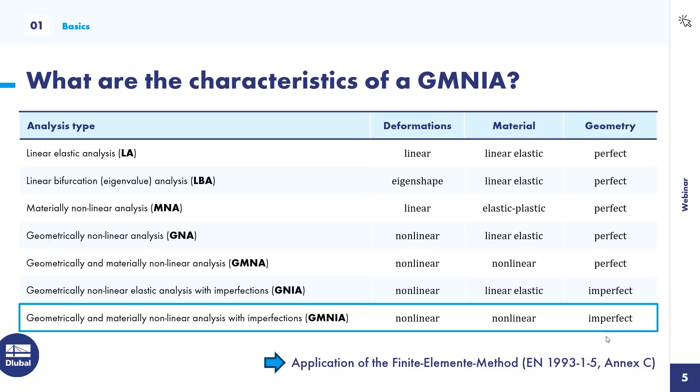Some rules for the application of a finite element method in this context are given in Eurocode 3, part 1.5, Annex C. This will shortly be replaced by a dedicated Eurocode dealing with finite element methods and their application for steel structures, bundled in Eurocode 3.1.14 in the second generation of the Eurocode. I will refer to this new code as well during this presentation.

You can think of the GMNIA as a virtual capacity test, which means that the design load is increased by a load factor until a clear state of failure is reached. Two limit states are defined in Eurocode 3 part 1.5 for the definition of failure and the determination of the critical load factor, which is the minimum of the following.

The load factor when the maximum of the load deformation curve is reached, as shown here on the left side of the slide, and the load factor when a maximum value of the principal plastic membrane strain is reached.

This is usually given by the annex or the base code as 5%, which is tolerable, but there might be some additional requirements in the national annexes.

The critical load factor is then the minimum of those two alpha U values, and this is then checked against the product of two safety factors on the resistance side, namely alpha 1, which describes the uncertainty of the numerical model, and alpha 2, which describes the uncertainty of the load and resistance model.

Here it is recommended to stick to gamma M1 if the observed failure mode corresponds to stability, or gamma M2 if we see that the maximum plastic membrane strain is reached.

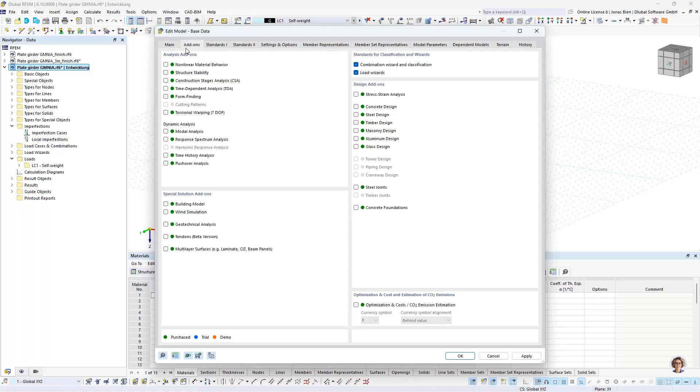All right, after we clarified this, let's go into the program and start modeling this. So I have already prepared a fresh file where we can now introduce the plate girder. As you can see, I have no objects here whatsoever, and also if we look into the base data of this file, there are no specific options activated. It's all a standard type of model, 3D and so on.

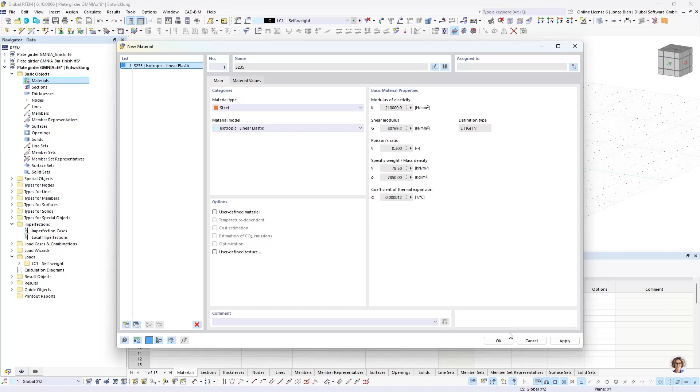Okay, so first of all, let's start with the material. We said we want to use an S235. So let's choose one. I always like to choose one that is related to Eurocode 3, but another one would also work.

Then let's move on with the modeling of the member itself. We could either directly go with the surface definition and try to place the flanges and the web plates in the correct locations, and also then we have to assign the correct thicknesses and so on. But we can also use another way. We can first start with a member that has the correct cross-section, and then we transfer this member into a surface model.

So I start with defining a parametric welded double symmetric I section in my section dialog with the respective dimensions that I want to have. So height is 1020 millimeters, width 360, thickness of the web would be 5 millimeters, and the flanges 20.

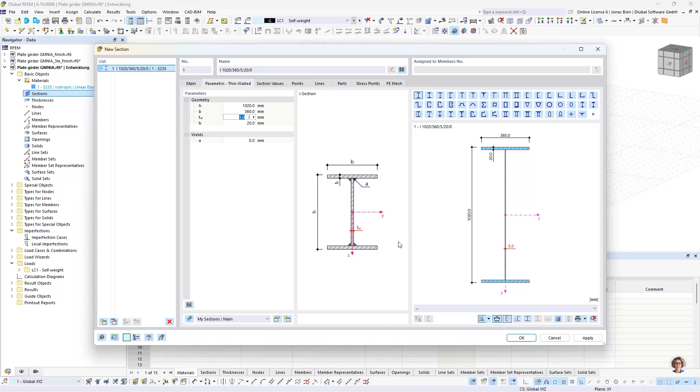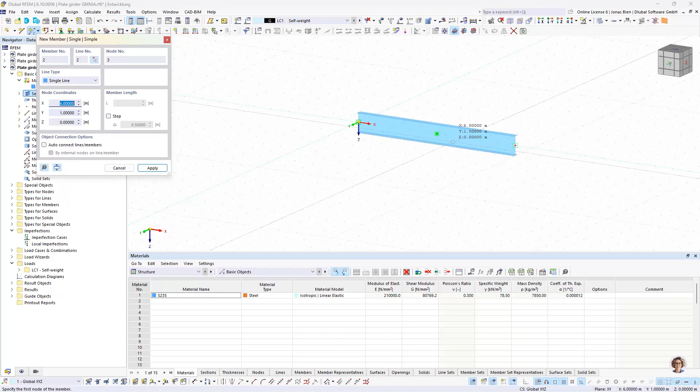So now it more or less looks like the picture that I have shown on my slides. I accept via OK, and then I just place half of my plate girder in the model. So one span was 4.5 meters, so I want to take in the initial model 2 panels, and then we can later mirror it.

So before I generate surfaces from this member, I also divide it, because I want to have a stiffener and some load introduction lines at the central position here. So I first divide this member with one intermediate node, and then I move on and generate surfaces.

And what this does, it already automatically generates these thicknesses that I need to represent this section in a surface model. It creates the nodes, the lines, and finally the surfaces that are necessary for this model. So this is a good starting point, I think.

Next, we want to create the stiffeners to finish the surface modeling part. Therefore, I need an additional thickness of 12 millimeters that I wanted to use for the stiffeners. I can also write a reminder for myself that this is for the stiffener, this is the web plate, and this thickness is defined for the flange plates.

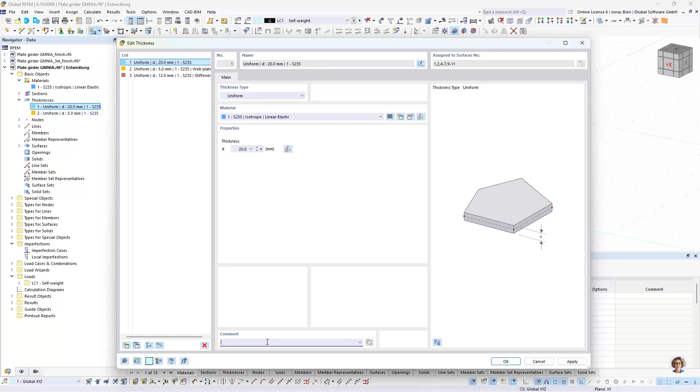Okay, I agree. And then I just place some rectangular surfaces in those positions where I later want to apply the loads. And if we think about this as the left half of our plate girder, we also said we want rigid end posts. So I would generate this by adding an outstanding cantilever part with an additional stiffener to really have a

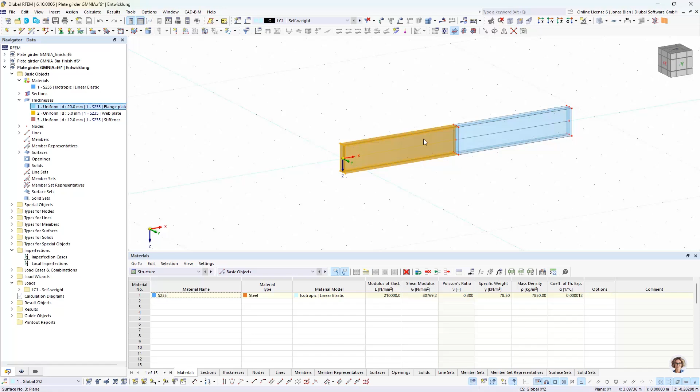very compact section at the end that can serve as a rigid end post. I can do this by just copying this panel here to the end. The length of this is also 4.5 meters, and I want a very short and compact cell here at the end. So I just move the end section back towards the initial position of this stiffener by, let's say, 4.2 meters.

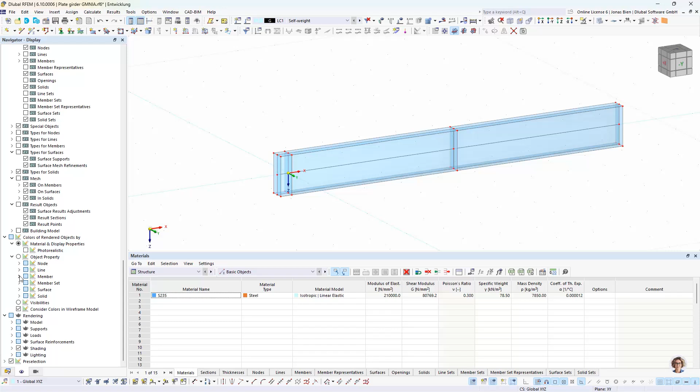And then I have a nice rigid end post without needing to define additional surfaces by hand. Okay, oops, didn't mean to do that. Alright, so then we can check if we assigned the correct thicknesses. I always like to check the rendering based on thickness, so we get a nice overview of what thicknesses are represented in the model and where they are. This all seems fine to me.

So we can continue with assigning the supports. I want to avoid singularities at the vertical supports, so I try to use line supports at this second line of the stiffener here. I just want to support this line in the Z direction. I don't want to restrain any deformation along the line or in the transverse direction.

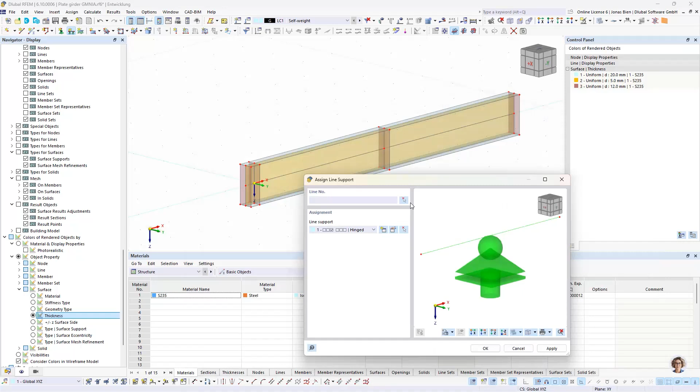I already see another problem: because we defined those rectangular stiffeners over the existing surfaces, we have some double lines here. We can quickly merge them by cutting and merging via this tool, and now we have single lines at these locations. That's a quick fix. Now I move on and assign the vertical supports at these two lines.

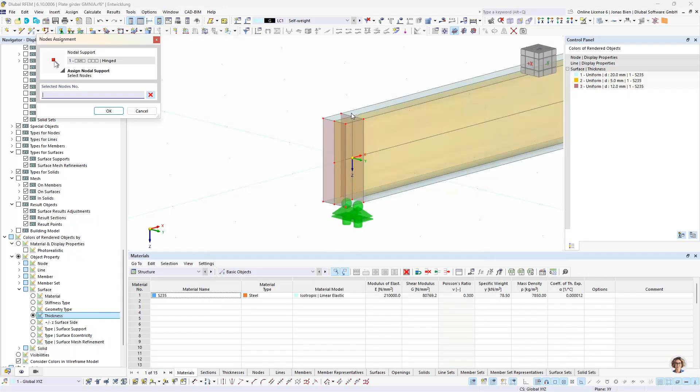Then I need to take care of the lateral supports. These I assign as nodal supports at some points that are very stiff. First, I have my lateral supports that I wanted to assign at the ends and also at these quarter points. I choose as a point of reference the crossing between the flange and web plates and the stiffeners. And then I also need to make sure to couple this point in the Y direction so it does

not tilt. I also need to somehow support my model in the X direction. That's why I also want to define one support in the global X and Y direction at the lower flange here, like here. Alright, so that would be the respective support conditions that I want for my half model.

I can later just mirror them when I want to create the full model. But before we do so, it would be wise to also define the loads, because there we can also leverage the mirror operation. So we go ahead and define our loads. Maybe one look back to the task description.

Here we can already see that we have concentrated loads, 3 different loads above the endpoints and the quarter points. The first represents dead weight, the second comes from snow, and the third comes from wind pressure. So I want to define these separately for those 3 load cases. Let's start with the definition of the dead load in the first case.

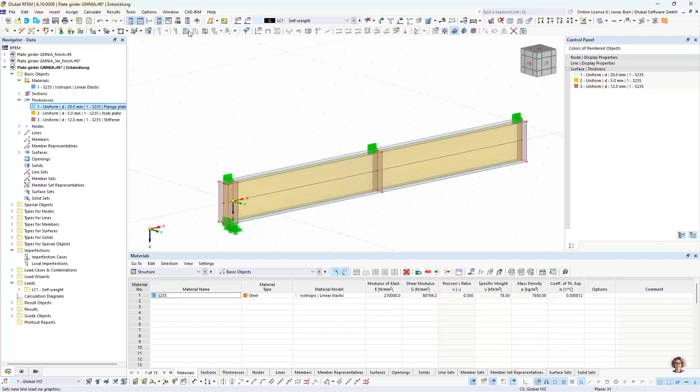I want to apply those loads as line loads, again to avoid singularities when using nodal loads. I could calculate my equivalent line load for a concentrated load of, for example, 15 kilonewtons by hand. But I could also use load distribution type uniform total, where the program does this job for me. I just have to enter the total load that I want to apply over the length of one line. Since I have 2 lines here, I need to divide my 15 kilonewtons by 2 to get the total

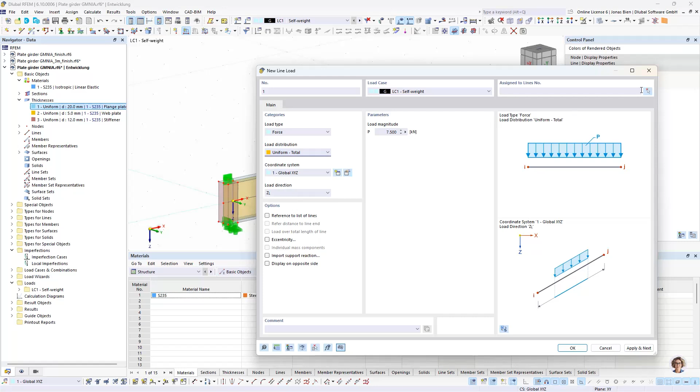load for one line. I want to apply this in the Z direction, and now I just need to select those 2 lines, assign this, and RFEM already calculated the correct kilonewton per meter value for us. If we multiply this value by 0.36 for the width of this flange, then we get 15 kilonewtons in total, as we wanted.

Okay, we can then just copy this definition to the internal lines or purlins where the load is transferred to our plate girder. Here we had a slightly higher load of, I think it was in total 25, so each line gets 12.5 kilonewton. And this definition we can also copy to the central lines here.

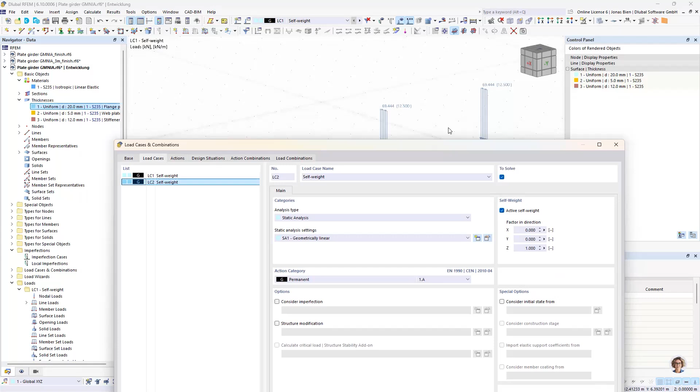Now we make a smart move and generate our second and third load case from our first load case. We do this by copying our first load case. This means that also all loads that we defined in this load case are copied, so we just have to change the action category. Now in the first place, I want to define the snow loads, and we have to take care to deactivate the self-weight if we copy from the self-weight load case. Otherwise, that would be considered twice.

And we do the same for wind, choose the appropriate action category, and click OK.

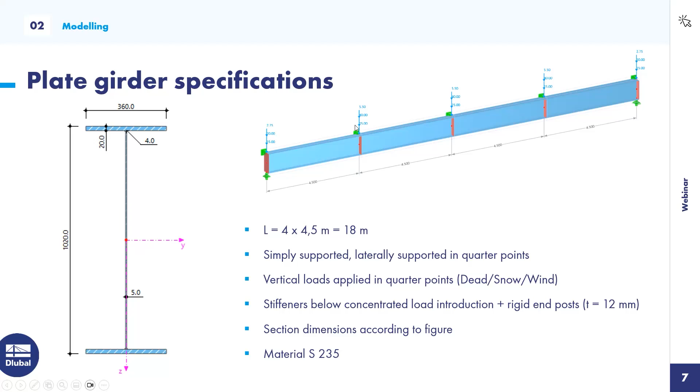All right, and I think then we can already mirror the whole thing. Maybe I don't want to mirror this load here because we have already defined this for the central position. I don't want to do that again.

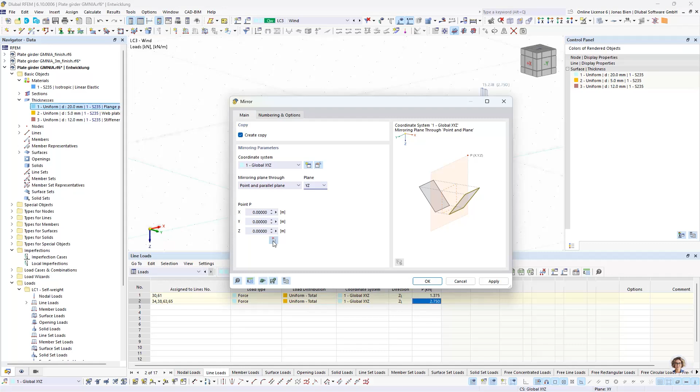And now I mirror all the selected objects about the YZ plane, and the plane should go through this point here. I make sure to copy the included loading and click OK.

And now I think by doing so, a copy included loading, it also recognized all the loading on these lines and copied it, although I did not manually select it. So now, as you can see, we have a double load here, and we just quickly delete this. Okay, then I only need to do one additional modification of this mirrored part.

I don't want to hold the plate girder in X direction on both sides. I don't want to activate any membrane forces here coming from large deformation in X direction. So instead of using support in X and Y direction here at the end node, I just copy the definition from above and just place a nodal support that supports in Y direction here instead. So it is free to move in X direction now.

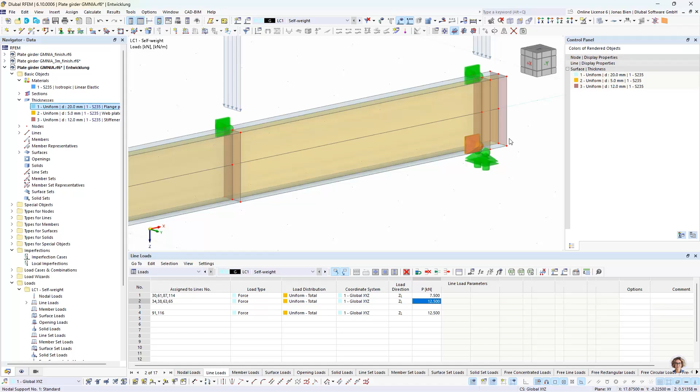Okay, then one more important part when creating a surface model in the context of steel design. Usually our base settings for the mesh are not really suitable. This element length of 0.5 meter is more suitable for, I don't know, concrete slabs and foundations. So not for us. Otherwise, we would only have 1 or 2 elements over the height of our plate girder, and that wouldn't be sufficient to get a good model here.

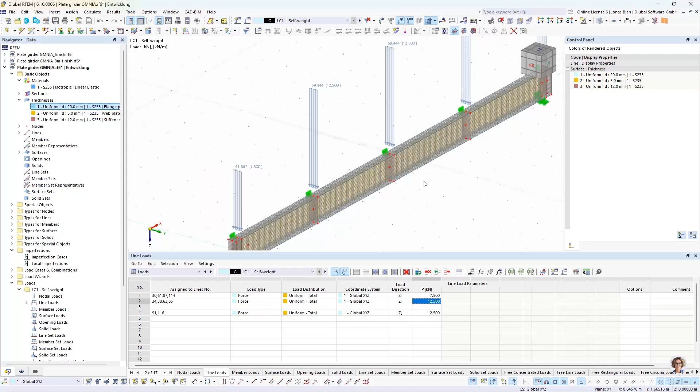So we just use 5 centimeter in the first step and check the mesh visually to check if it is reasonable. And I think in the first step, this is all fine. It is always advisable anyway, in the context of a GMNIA, to make some sensitivity study of the mesh refinement at some point. But I think this is a good starting point here, this level of refinement.

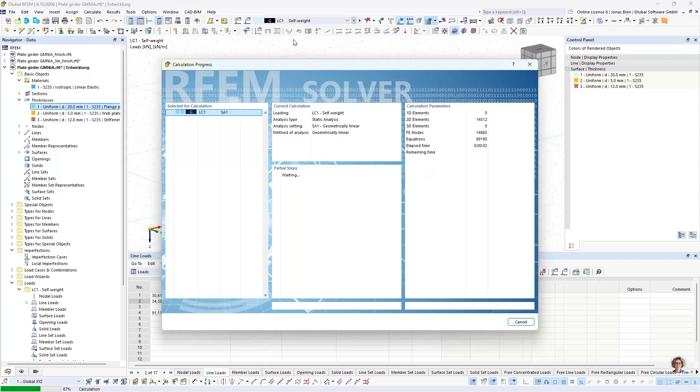We can also check if we defined the model properly by just running one test load case, for example load case 1, and see if everything is connected properly, if we have supported the model sufficiently. And it looks quite okay to me. The deformation shape looks as expected.

As I said, it can deform in X direction here at the end, so no restraining forces in that direction. We can also check the stresses in X direction. We have only bending here, so everything as it should be, and this is fine.

Then maybe we need to think of a combination of our load cases. So let's go there as well.

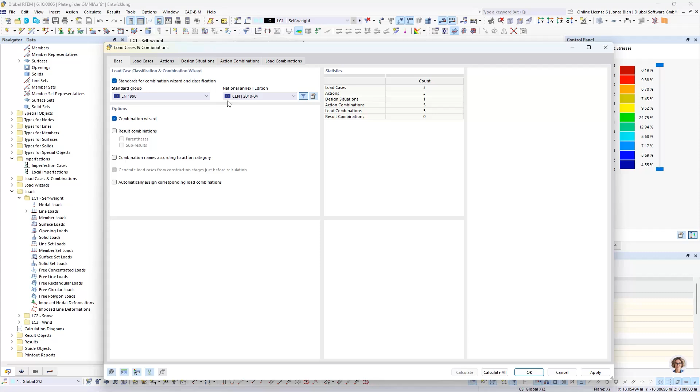By default, we have 4 different design situations that RFEM generates for us in a new model. We only want to do checks in the ULS combination, since we only want to check our model for strength. So we leave that in, and with the combination wizard activated by default, that gives us 5 different load combinations.

But for us here, it is very easy to see that load combination number 3 results in the largest loading, or is the most critical loading combination for our case. So because I know that GMNIA analyses are quite heavy on computational time, I want to reduce the load combinations I need to take into account to a minimum.

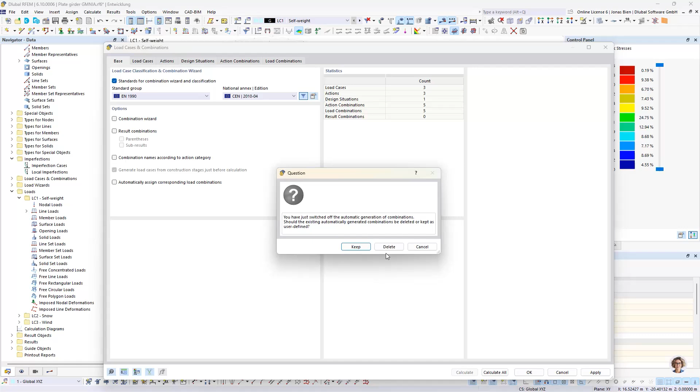So I deactivate the combination wizard, say I want to keep all the load cases and load combinations, and then I manually delete all other load combinations and only leave CO3 for later analysis. Then in the first step, I use first order theory for analysis.

Okay, I think that's it for the definition of our base model, and we can now tackle the special ingredients of the GMNIA. So let's start with the imperfections.

According to Eurocode, residual stresses resulting from the manufacturing process of steel girders need to be taken into account. These residual stresses originate from uneven heating and cooling of the material during manufacturing. In a plate girder, very high local temperatures and corresponding material expansion occur when the web and flange plates are joined by welding. The individual cross-section parts are joined in this heated state.

And if the component then cools down again, constraint-free contraction of the material is no longer possible, and residual stresses remain in the cross-section. Those stresses are in sum in equilibrium with each other across the cross-section. The stresses shown here on the lower right side are specified in the draft version of Eurocode 3, part 1-14, for welded double symmetrical I-sections.

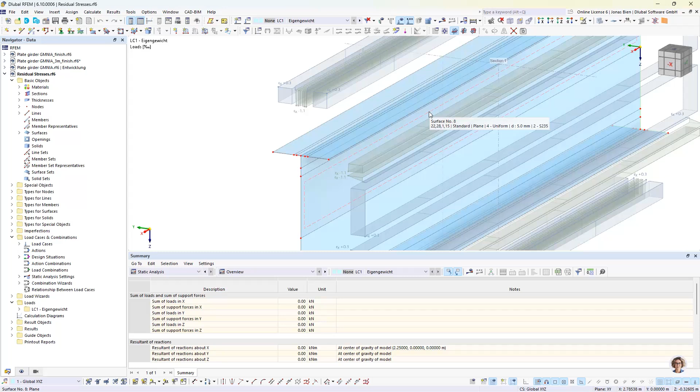But it took so long that I don't want to stress my time limit again today. So if you're interested in the modeling procedure - you know now the background - then head over to the German webinar and see how I've done it. But I want to explain the most important steps here.

So I have divided my model basically, and then I applied an actual strain state. You can find those under surface loads, load type axial strain. And there you can choose between a uniform and a linear load distribution. In this case, for this constant strain or stress block, I defined only a uniform distribution with a magnitude of 0.3.

And if we check, I've entered this via formula - I just divided my yield strength by the Young's modulus and divided it by 4. This leaves us with a positive strain, and the positive initial strain leads to later compressive residual stresses. We will see that when we run the simulation.

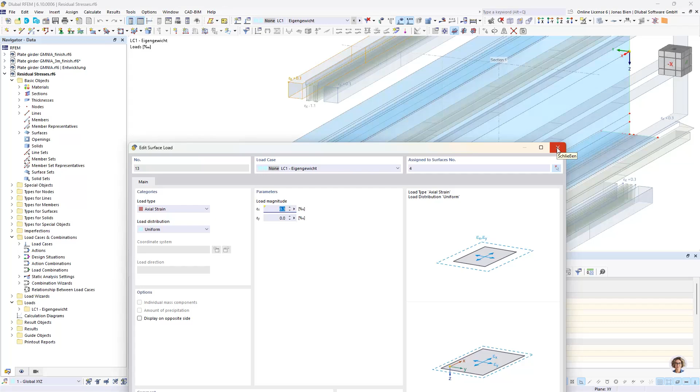Similarly, I did the same in the middle of the flange plate, where I just defined a block of axial strains with a negative sign now, and this is just described by yield strength divided by Young's modulus. And then in between, I applied this linear load distribution.

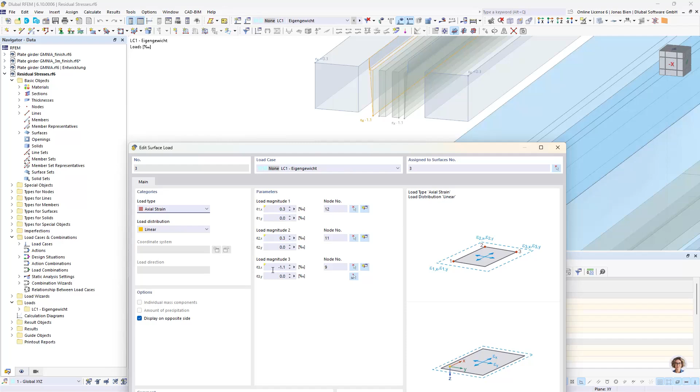I used 3 corner nodes to describe the distribution of my loads. You can check this out in the German webinar if you're interested, but it's pretty straightforward. Here I just defined 2 nodes with a tensile strain and 1 with the compressive strain to get this distribution over the flange plate. And I did the same basically for the web plate as well.

So what I've done also was I changed the mesh size a bit. I chose very small element edge sizes, so I have at least 2 elements over each surface. So we can also see this linear, or this gradient, in the stress distribution here. So we can actually represent this with the mesh size.

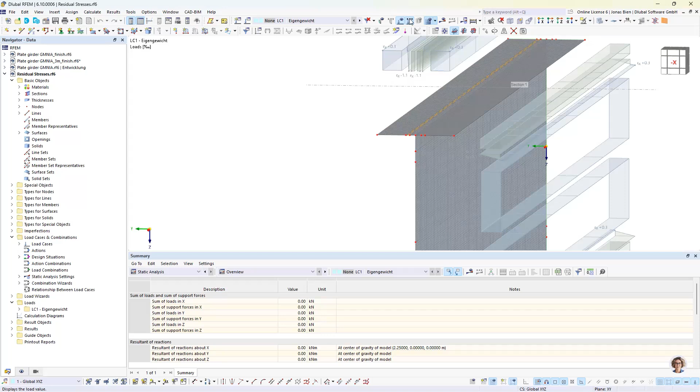Yeah, and that's basically it. So let's check the results. I've already computed it. Maybe one last note: on this end of the girder, I have applied some line support, where I just held basically every node in place, also in X direction. And this is very important because by doing so on this end of this girder, I restrained every warping of the section and every deformation in X direction, in longitudinal direction.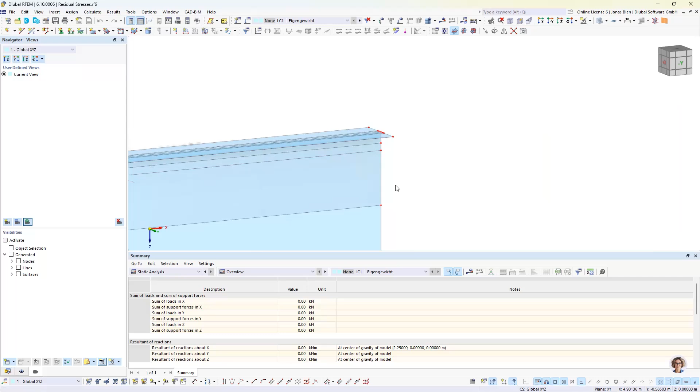On the other end, I didn't do that. So here all my filaments or fibers of the section are free to move in X direction. And we can see that this has a great influence on the resulting stress state. So here, where we have more or less a disturbed state, where movement is free in X direction, you can see that those residual stresses actually vanish, and they diminish here at this free edge.

But basically, this is what happens in reality as well. If you have such a girder and you would cut it in some plane, then these residual stresses would be freed, and you actually see that on the deformation shape. So the section would go into the shape it wants to go after, with the residual stress state, and that would be the way it would look at this free edge.

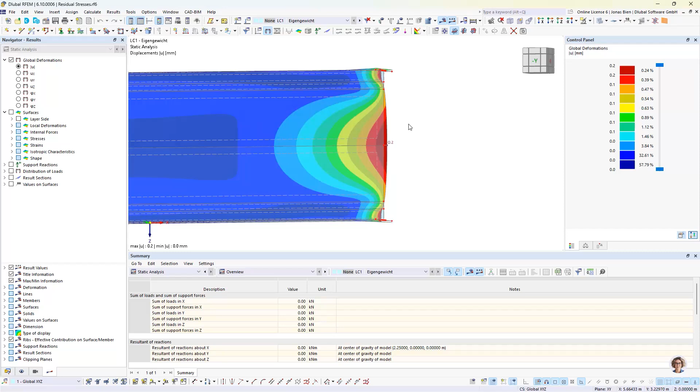Of course, this is exaggerated here, so the resulting deformations would be very small, but that would basically happen in reality as well. On the other edge, I held every node in place, so it cannot happen there, just to show you the difference and the behavior that we get by simulating this effect.

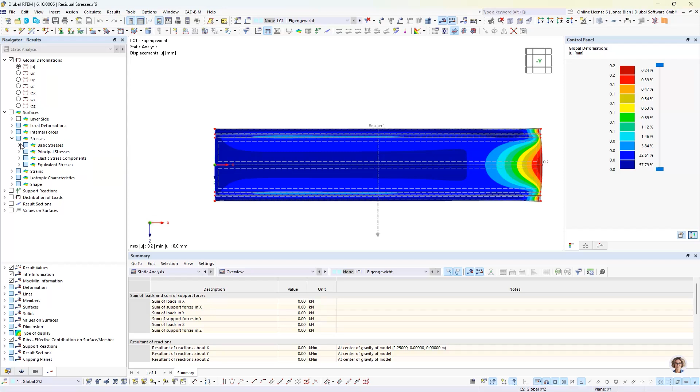Let's check the stresses again. So I've now shown the stresses in X direction, and we can already see that we have compressive stresses in these blue areas, and in the red areas we have some tensile stresses. It's not very good to see the actual numbers.

That's why I also inserted a section here in the middle with a certain distance to the member ends to have an undisturbed region. And maybe we can also check the stress state in this section. Here we actually see that in these tensile zones between flange and web plates, we have almost exactly the yield stress as a residual stress, and in these compressive parts we have Fy divided by 4.

So this is exactly what we wanted to simulate when we look back into our PowerPoint slide here. So this is one method to apply such residual stresses in a surface model of such kind.

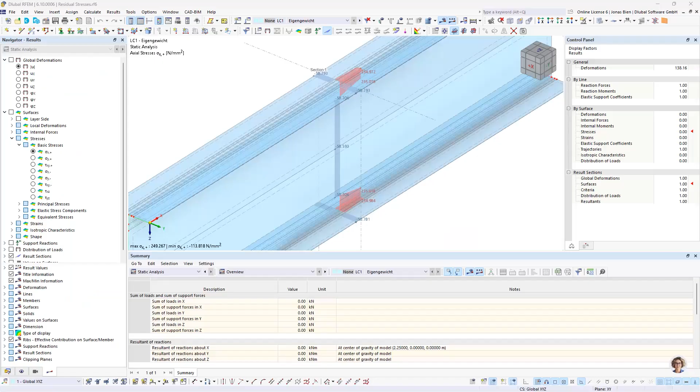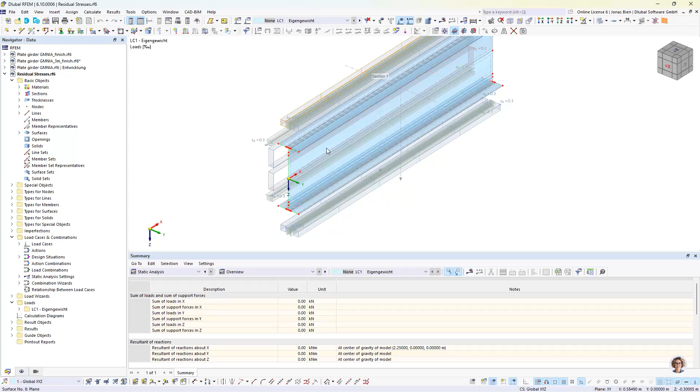Another way would be to not use this load type axial strain, but to define a similar thing via temperature increase. So with temperature, and the material properties, we could simulate an elongation that the steel would like to make, and since it is restrained over the cross section, we would get a similar residual stress, just that we would need to add an additional step and take into account this alpha elongation factor, or expansion factor, of the steel, which makes it a bit more complicated.

So this is the easy way to do it. All right, but this was just a small excursus. Let's get back to our actual model. Of course, I will also upload this smaller residual stress model with the slides, so you can study this for yourself.

Okay, back to the presentation.

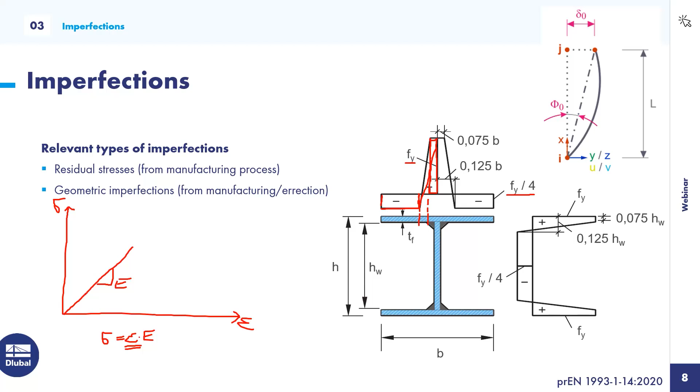We have now talked about one relevant type of imperfection, which is the residual stress that comes from the manufacturing process, as already explained. In addition to residual stresses, we also have to take into consideration geometric imperfections. These simulate deviations from standard dimensions or misalignments of elements during erection on the construction site. We know such geometric imperfections from Eurocode 3 1.1, for example, and this is exactly what is meant by this type of geometric imperfection.

So we could either specify residual stresses and geometric imperfections separately, but we have seen how cumbersome the definition of residual stresses can already be. And for some sections, we might not even have a clear statement for how to approach this residual stress problem. For a double symmetric welded I-section, we have the definition given in Eurocode 3 part 1.14, but there may be cases where this is not applicable.

So luckily we have an alternative: Eurocode 3 part 1.5 also allows us to take into account residual stresses not explicitly, as we just did in this small model, but by increasing the basic geometric imperfections. So we just apply geometric imperfections and increase them by some factor. Both types of imperfections are then summarized as equivalent geometric imperfections.

And this is the approach that we want to take for our plate girder. So let's look into those equivalent geometric imperfections in more detail. The good thing is that we don't need to increase the geometric imperfections ourselves, but the magnitude for those geometric imperfections is actually given in Eurocode 3 part 1.5, and these already contain the residual stresses.

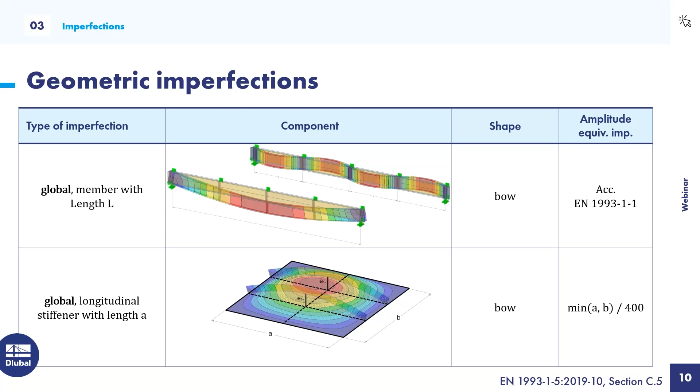So to find the specific amplitude, we go to Eurocode 3 part 1.1 and check table 6.2 to see what buckling curve we actually have for buckling about the weak axis. In our case, we have a welded I-section with a flange thickness less than 40 millimeters, so we would choose buckling curve C.

Next, we would check table 5.1 of Eurocode 3 part 1.1, and we would then choose the imperfection value for a plastic section check. In the end, we are doing a nonlinear analysis with nonlinear materials, so we are also accounting for redistribution in the cross-section, which means we basically want to do a plastic section check.

And with this information, along with the information on our buckling curve, we can then read the imperfection amplitude for our equivalent imperfection as 1 divided by 150 for buckling about the weak axis. We would then need to take half of this for our lateral torsional buckling imperfection.

The last question is then to which length does this value refer? Our flange is under compression and held in the quarter points, so we apply the imperfection alternating between those intermediate supports, as also shown above in the figure on the slide.

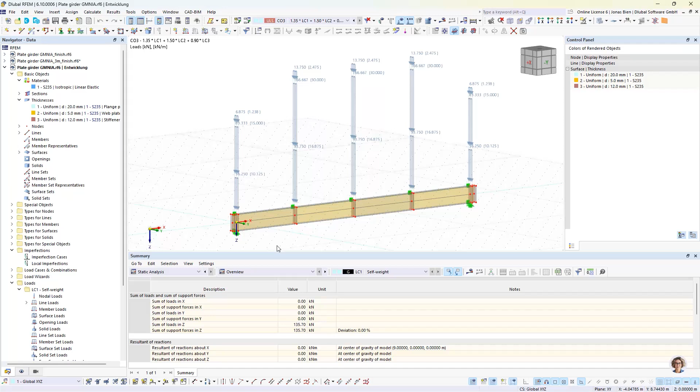So let's do that, and the concept will become clear during modeling. First, we define an additional load case where we apply a load that gives us a deformation shape equivalent to the imperfection shape we want to apply. I start with defining a new load case, and name it bow imperfection static to remind myself. For the action category, I choose none, so it doesn't accidentally get combined with other things if I have a load combination assistant activated. Now in this load case, I define some loads that give me the deformation shape I want to take as an imperfection shape.

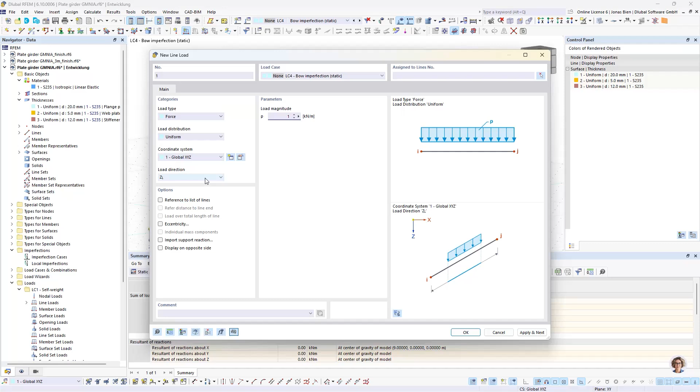I would just scale this to a default value. It doesn't matter in the first step how large this deformation appears in the static analysis, since we can scale it later when we apply the imperfection case. First, I want to deform my girder in the y direction by defining loads on the lines between web and flange plates, so I avoid having the section itself deform. I want more or less a member deformation without distortion of the cross section. So I apply this dummy load in one direction, and then alternate the direction of the deformation.

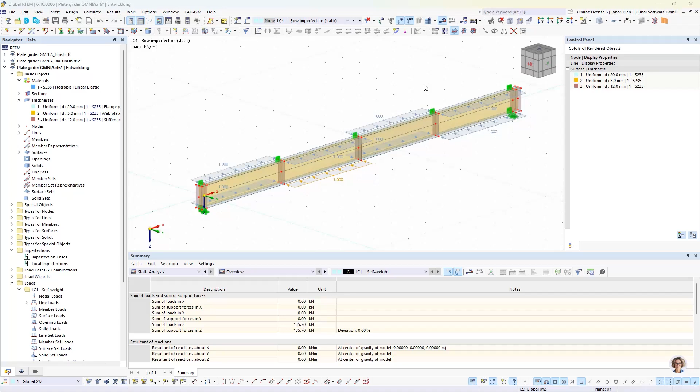Now if I run this analysis for load case 4 that I just defined, we hopefully see some kind of bow-shaped deformation here. Let's actually check the global deformation. Yes, this looks exactly as expected. I get a bow-shaped deformation shape with zero points at the inflection points and the quarter points where I wanted them. This is a good basis for my imperfection shape. You can also see that the maximum deformation here is now 0.3 millimeter.

This is of course a bit too small for the imperfection that I need. We said we want to define the length between these inflection points divided by 300, which would be 4.5 meters divided by 300, so 15 millimeters. But that can actually be set in the second step, where we define the imperfection itself.

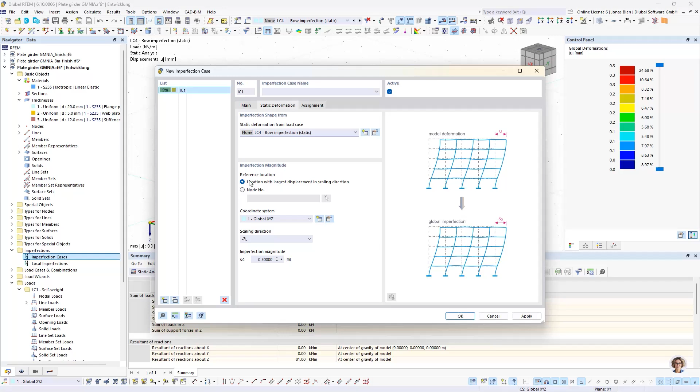In this case, we want to use an imperfection type static deformation. There we have to reference a load case or load combination from which we want to adopt the static deformation, and then scale it somehow. So I want to source my deformation from load case 4, and scale it spatially just as it appears here when I check the total deformation plot. I want to set the magnitude, which I can handle via formula, to 4.5 divided by 300, giving me 15 millimeters. Now I have this imperfection case 1, which I can also calculate or simulate, and it will scale the deformation shape from load case 4 to the value I want, 15 millimeters, and that's exactly what we get here.

It's nice to check this. Then we can apply this imperfection as we usually do, for example, to load cases or to load combinations here with this option.

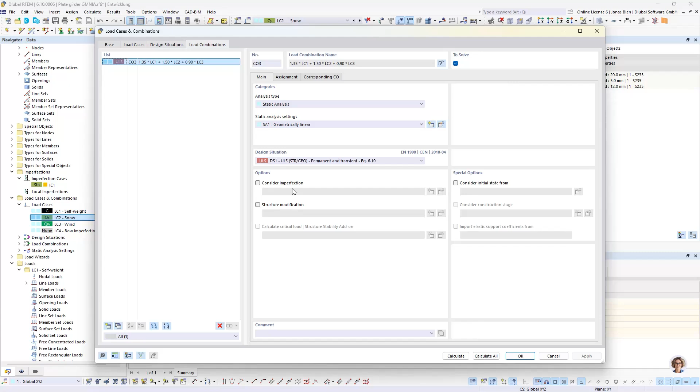But we are not finished yet. We need some other imperfections that we need to apply to our structure. So let's go back to our presentation. The first step is done. We have the global bow imperfection considered, but there are two more geometric imperfections in Eurocode 3 part 1.5 that need to be taken into account if applicable to the problem.

Those are the local buckling shape deformations in the buckling panels, or potential buckling panels. If we use geometric equivalent imperfections, the amplitude of such imperfections should be the minimum dimension of the panel divided by 200. Let's see how we can apply this buckling shape affine imperfection with this specific amplitude in RFEM again.

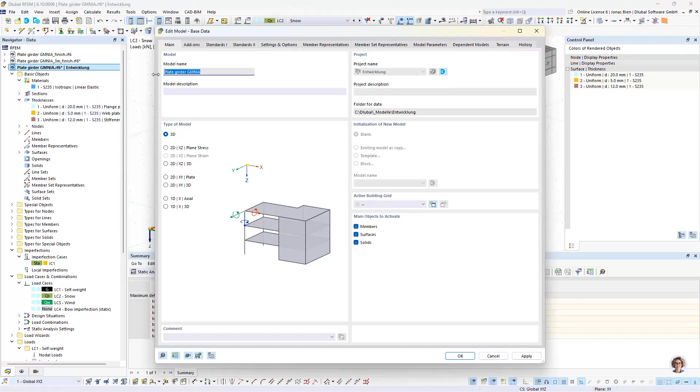To get a buckling shape deformation, we of course first need to do a linear buckling analysis. For this, I need to activate my structure stability add-on, and then I get access to linear bifurcation analysis, which I want to set up for load combination 3, where my design loads are defined and combined. For this load combination, I want to get some eigenshapes, and choose the critical one from that. Four eigenshapes is maybe a bit low, so I want some additional information and set this value up to 20. It will now, after defining the stress state in my structure, calculate the linear bifurcation factors, assuming everything is perfectly linear. Besides the linear bifurcation factors, I will also receive my respective mode shapes.

So this takes a bit. I want 20 mode shapes, and these are quite a few elements, but it should finish very soon.

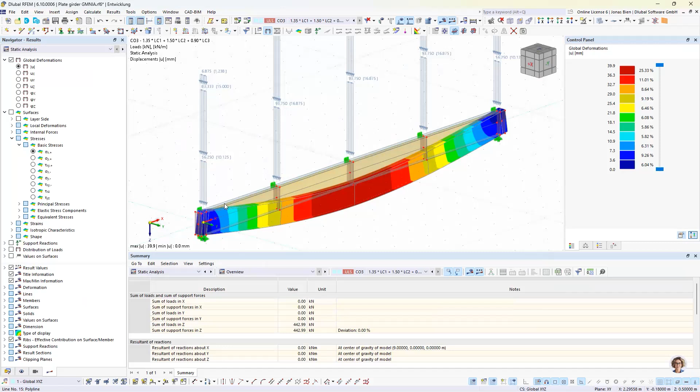So now, in addition to the static analysis results, I also get stability analysis results. If you are interested more in this linear bifurcation analysis and what we can do with it, check out my last webinar on this topic. I think it was called something with linear bifurcation or buckling analysis in RFEM 6 and RSTAB 9.

So there you can get a lot of background information and additional info. So what we basically get now are 20 bifurcation factors with the respective mode shapes. And now the question is, of course, which mode shape do I need to take into consideration for my nonlinear analysis? We can already see that the first 12 mode shapes only affect the external or outer buckling panels, while the 13th shows the first modal deformation in the internal buckling panels.

And the Eurocode offers not really huge help here in this respect. It just says that the most critical imperfection needs to be taken into account. This is often not quite straightforward to get. So if we are in doubt, we would need to take into consideration different mode shapes and also maybe different imperfection directions.

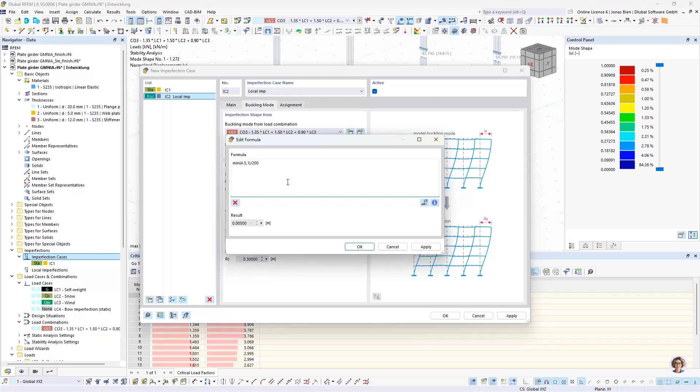We scale it spatially again, and as an imperfection magnitude, we set the minimum of the panel dimensions. So panel dimensions would be 4.5 by 1 meter divided by 200. It's always very convenient to just use the formulas to plug this in, and you don't need your calculator. You have a reminder if you are unsure, you can check the formula again and so on.

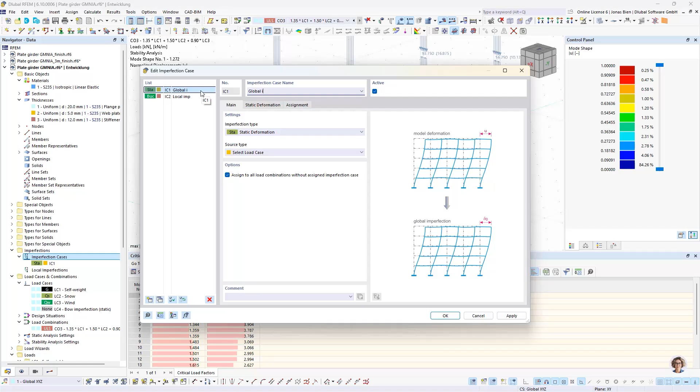So this is very handy. Okay, so that would be this definition. Then let's also rename imperfection case 1 to global imperfection, so we can have a quick distinction between those.

And now if we also solve this second imperfection case, we should get the eigenshape that we just saw now, but now scaled to 5 millimeters maximum deformation. So that's perfect. All right, so 2 imperfections are now already defined.

Let's go back to the presentation, because there is a third and last type of imperfection that we must take into account, and this is flange twisting to generate. So, and this flange twisting, we need to consider between different sections. So in our case, we have some transverse stiffeners.

And between those stiffeners, we need to account for this bow twist, and the bow twist should have an amplitude of 1 divided by 50 times half the flange width.

And the question is again, how do we do this in our program? Because neither the static nor the buckling imperfection type are really helpful in this case. But what we can always do in this kind of analysis, we can always like burn or engrave the imperfection into our basic geometry. And I want to show you this as a third option.

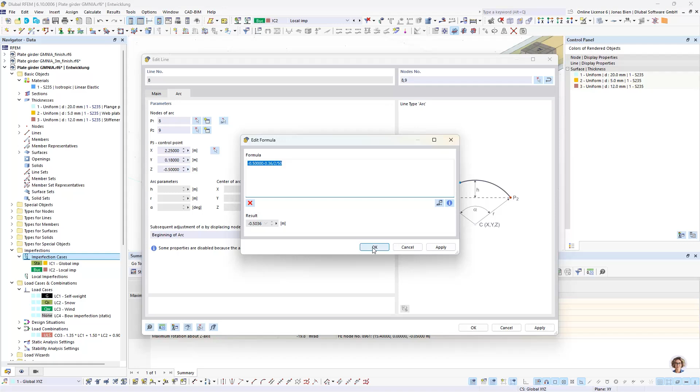And apply this change. And now we will see that when we look from the side, this is not a straight line anymore, but it's curved, and this will lead to a twisted flange in the end. So that's perfect for our imperfection.

But we also see that now we have some problem, because our surface here is gone, and we also see that this respective surface is now marked with the red color here. That is always bad, but it's very easy to fix in this case, because we defined initially this surface as a plane surface. This is no longer true, because one of the boundary lines is now an arc, and we can just fix it by changing the geometry type of the surface from plane to quadrangle, and this resolves the issue.

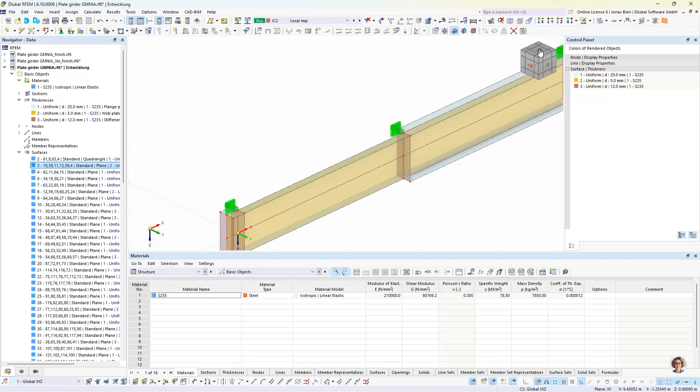And now the question is, how do we proceed from here, because there are many surfaces that we need to change. But instead of doing all of this manually, we can again be a bit more clever and use some modification functions to copy this imperfect geometry to the other locations along our member.

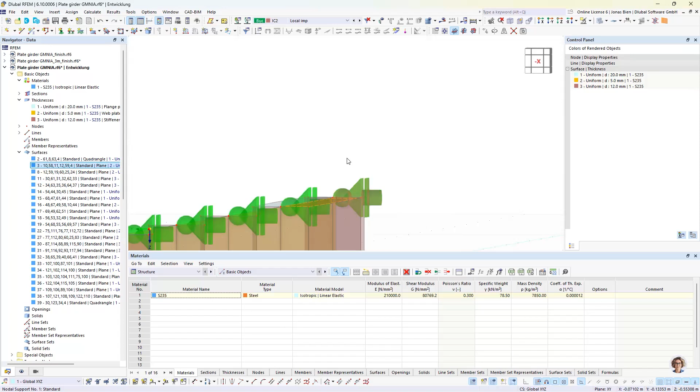So in the first step, we could mirror this surface, or rotate it over the x-axis. I think that would be the most appropriate approach, by 180 degrees. I create a copy. So this should be the axis of rotation, and the axis of rotation should go through this point. So I click OK, and now I see that there's an imperfection on this side of the flange as well, but in the different direction.

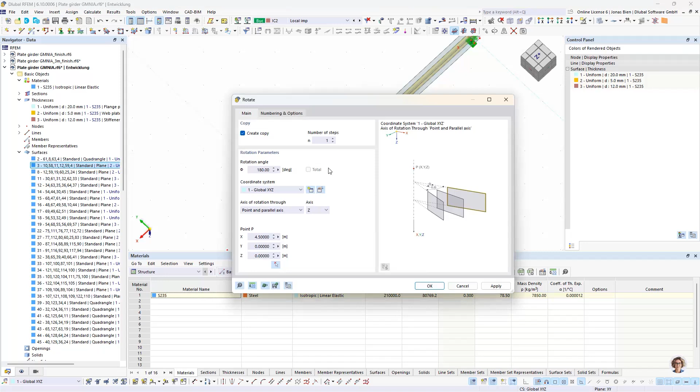That's how I would assume this flange twisting would look like over the complete width. And now I can just copy those two surfaces from the upper flange to the lower flange. And in the last step, I take all those flange plates and rotate them again, but now over the z-axis, so the vertical axis, and I carefully choose my location of the rotation axis, like so. And now I have to do this two times more to do this definition for the whole member length.

And as you can see, with leveraging these tools in RFEM, it's quite easy and quick to create such imperfect geometries.

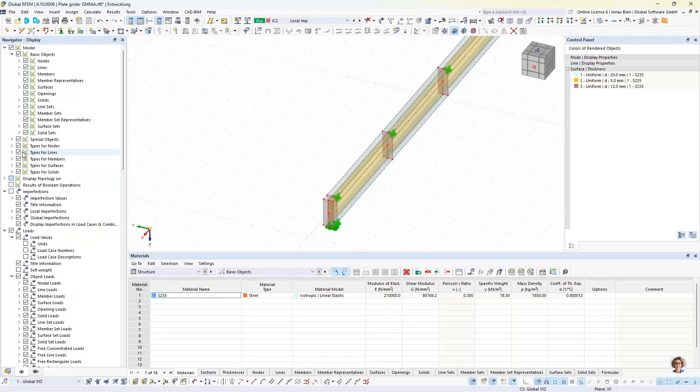So let's actually check how does this look now. We can clearly see that there is some flange twisting now modeled here, exactly as we want. It alternates between, or from one inflection point to the other one. So this should be the most critical case in this scenario here, or the most reasonable assumption for such flange twisting imperfection.

Okay, so now the last question is, how do we combine all these imperfections together? In Eurocode 3 part 1.5, we have a combination rule for equivalent geometric imperfections.

We have one primary imperfection that we assign with 100%, and the other ones we take at 70%. But just to make things a bit simpler here, I would just take them all with 100% amplitude, because most of the time, or in most of the cases, there's always one or two imperfections that are not really relevant or critical for the end result.

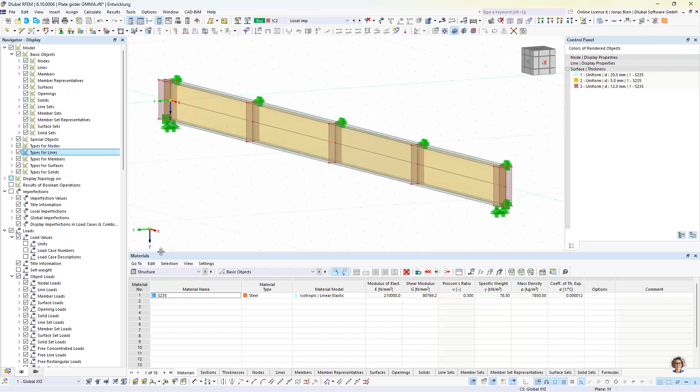So we could either put in a lot of effort to select the most critical one and apply 100% amplitude magnitude to this, or we can just on the safe side assume the full 100% for all imperfections, and the ones that do not really harm our simulation will just more or less do nothing. Of course, we could refine it later if we want, or if we find that our solution is not economic, but due to time limitations, I don't want to do that here.

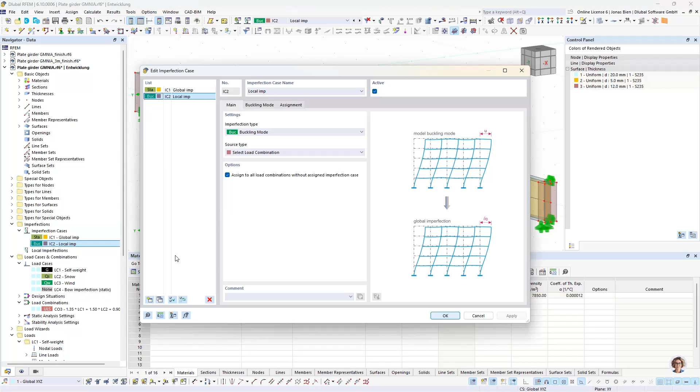So instead, I just generate an additional imperfection case with a group of imperfection, where I now superimpose the two imperfection cases, imperfection case 1 and 2, and I can do this very conveniently over this table, where I just define imperfection case 1 should be present together with imperfection case 2.

You could change direction here very easily by modifying this factor, or also you could lower the amplitude by just putting here like 0.8 or something. If you would just want to apply 80% of the imperfection, that would also work. And then I just need to assign this group of imperfection to the load combination that I want to use for my GMNIA.

For now, we only have this load combination 3 that we used, and we also need the buckling shape imperfection. So I will not alter the existing one or use it as my GMNIA load combination, but instead copy it, and run the GMNIA analysis on this copy. This means I want to consider the full set of imperfections. The flange twisting is embedded into our model, and the other two imperfections are now taken into account in this load combination.

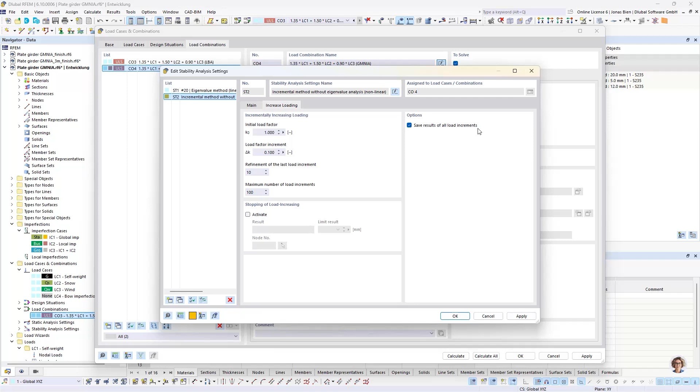So I will stick with them. But what I would highly recommend would be to save results of all intermediate load increments, because analyzing those intermediate deformation, stress, and strain results gives a lot of valuable information to assess the failure mode and the behavior of the structural elements. So I would always recommend doing that.

And with this, 95% of the job is done. The only thing left is the nonlinear material. In the beginning, we defined a linear elastic material here without putting too much thought into that, but we of course also need a nonlinear material.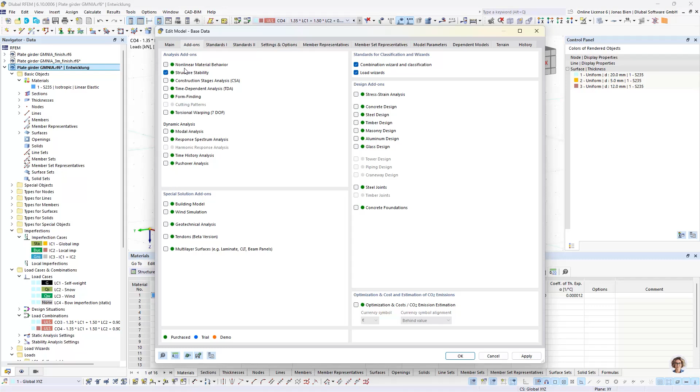To access all the nonlinear material models in RFEM, we need this additional analysis add-on, and we also need to activate it for our model. When we do so, we finally get access to all those nonlinear material models.

For our job, I want to use a plastic isotropic material model for steel, for surfaces and solids, and the von Mises failure hypothesis, or yield hypothesis, is quite fine for us.

I don't want to spend too much time on the material definition, I talked about this in our older webinar. So if you're interested to see what options the Eurocode gives us and what is suitable for such an analysis, I would highly recommend checking the old webinar.

But now I will just go ahead with a bilinear stress-strain model, and I want to use a hardening modulus of 1/1000 of our initial modulus of elasticity, which is valid with regards to the Eurocode rules.

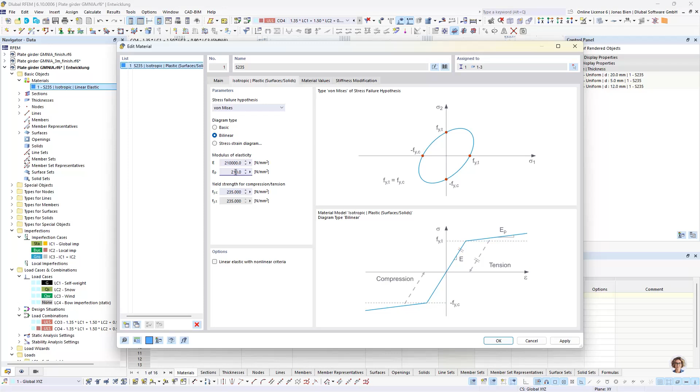And because I have now taken a user-defined hardening modulus here, I also need to reset my yield strength, because I made my material model a user-defined material model. Okay, and this would be all the steps necessary to set up the GMNIA analysis.

The solution of this problem as we defined it would probably take like 4 or 5 minutes, and I don't want to bore you with this simulation. So I have already calculated this, or a calculated version of this. It should be more or less the same model. The only difference is that I also baked this bow imperfection into the geometry, and only the local buckling shape imperfections are defined as an imperfection case.

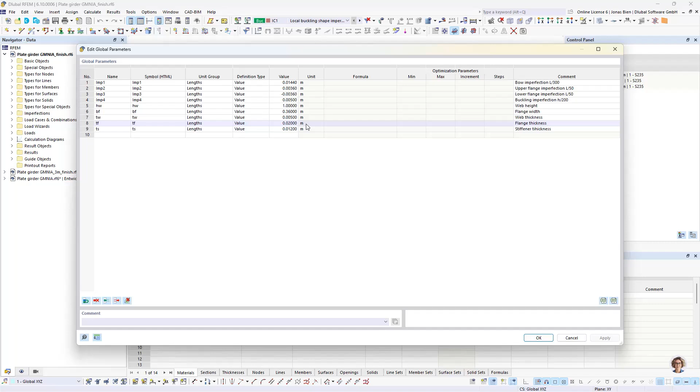In addition, everything is parameterized in this model, and this is also the model I will hand over to you with the presentation, so you can play around with these numbers and do your own investigation on your own geometry and your own plate girders if you like, and you can vary stuff very easily.

So with this being said, let's check the deformations or the results of our load case number 4. Since we have conducted a nonlinear stability analysis, we also have results for that. And what we already see is that the highest load increment that converged was 15, with a load factor of 1.95, which is quite far away from 1. Or even if we consider the safety factors that I initially mentioned, it's quite far away from that. So that's already a good sign.

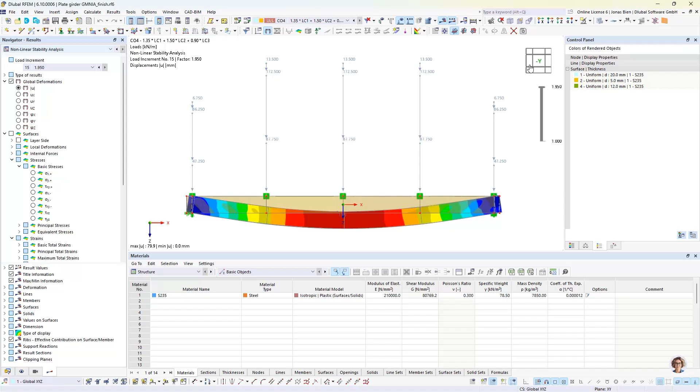And since we saved all intermediate results, we also have this slider that we can now leverage to check different results during the calculation. For example, one thing which is quite interesting is if we check the lateral deformation. I can just quickly get rid of the model and all the stuff that we don't want to see. But you can also now animate the deformation over the course of the simulation. This is also quite a nice feature.

And what we see as we approach the maximum load factor is that these lateral deformations of the compressed flange escalate. They really increase a lot with a small increase of load. So this would already, from looking only at the deformation shape, give us some indication that probably lateral torsional buckling is the failure mechanism here, and is the reason that after this load step, no more additional load steps converged, so to say.

We can also check the load deformation history, the global one, for example. We can display a calculation diagram where we compare the load factor with the maximum deformation, and we can see that the stiffness of our system approaches more or less zero at this point. And negative stiffnesses, we cannot compute with our solver. You need special solvers that are able to compute also the softening part.

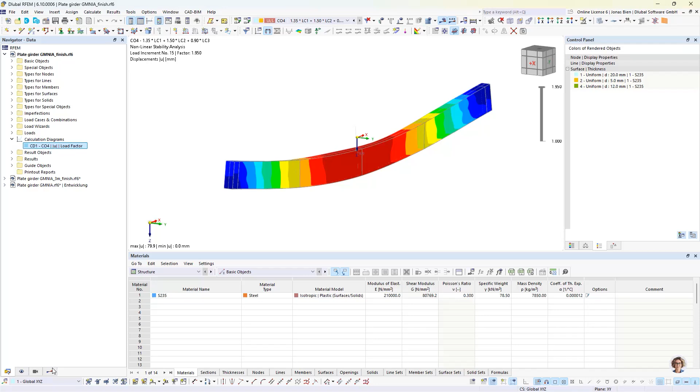So this is probably the most that we can get with our methods of this analysis, and that would then also be the load factor that we would take for our failure criterion number 1. And when we remember the failure criteria for GMNIA analysis according to Eurocode 3 part 1.5, there was a second one mentioning plastic strains. So let's also address this and check plastic strains in the model.

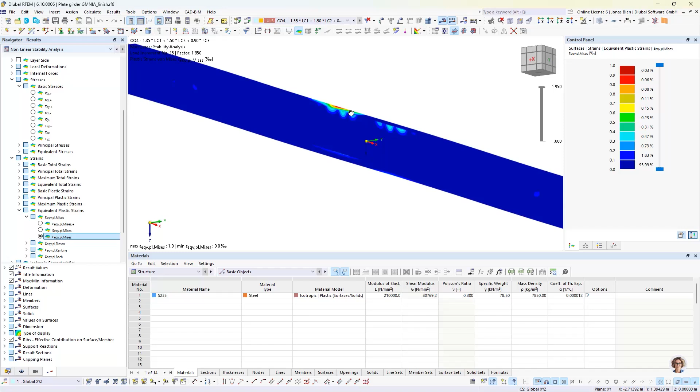And we see that at the maximum load factor, we have strains of approximately 1 per 1,000 in the flange region, in the upper flange at midsection, where our compressed flange actually deforms most, and also in the transition between flange and web plate. There are only very minor strains visible in the shear panels itself. So this would not be the relevant failure criterion, the strain-based one, and we would only check the 1.95 as a maximum of the load deformation curve against alpha 1 times alpha 2, which would definitely be lower than this. So that would be our check, basically.

So this is quite interesting for me, at least, to get a feeling for the failure mode and to check what the deformations look like during this calculation, and what happens if we push over the linear behavior of this model, and what happens then.

And it's in the next step also interesting to see what happens when we change certain parameters. For example, I simulated the same girder with the same loading conditions, just with shorter buckling panels of 3 meters. And when assessing the results here, it looked quite different.

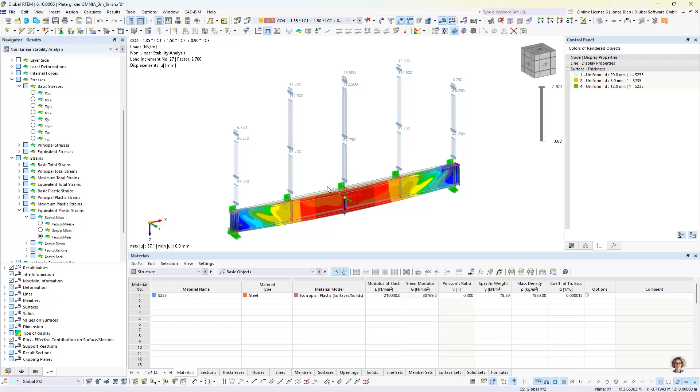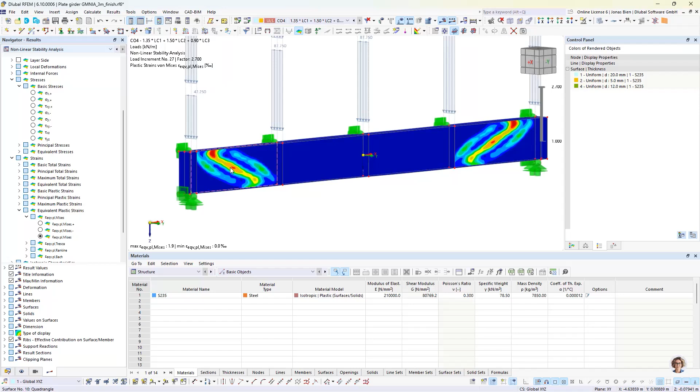Of course, due to our imperfection, we also have some transverse deformation occurring in the model, but they are not as pronounced as before. Instead, if we now look into our strains in the model, we see that the maximum strains now are not found anywhere near midspan, but in the buckling panels close to the supports. And those are also a bit higher already.

They are nowhere near the 5% limit, but we can see that the strains throughout the last load increments increase drastically in these shear panels. So in this case, we could expect a whole different failure mode, not the global lateral torsional buckling mode, but rather a shear buckling mode in these external buckling panels here, as a critical failure criterion.

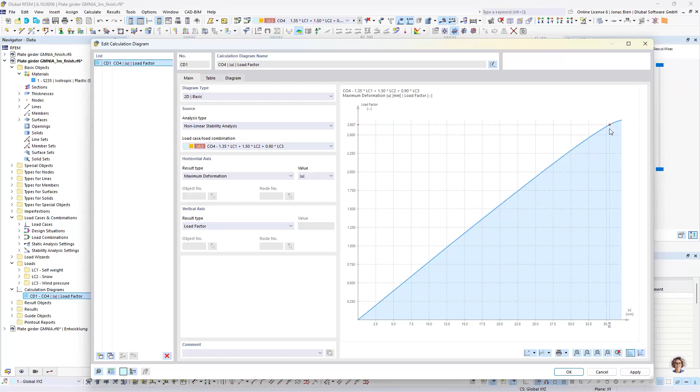We could also see how this nonlinearity, or the excessive deformation in those shear panels, affects the global load bearing behavior, and we can also see that the stiffness of the global system becomes much smaller.

That for me would be very interesting to see when these different failure modes diverge, what do I get when I change certain parameters, when I change the web thickness, for example. So that's quite a nice exercise to do, and if you have a fully parameterized model, it's very easy to do as well.

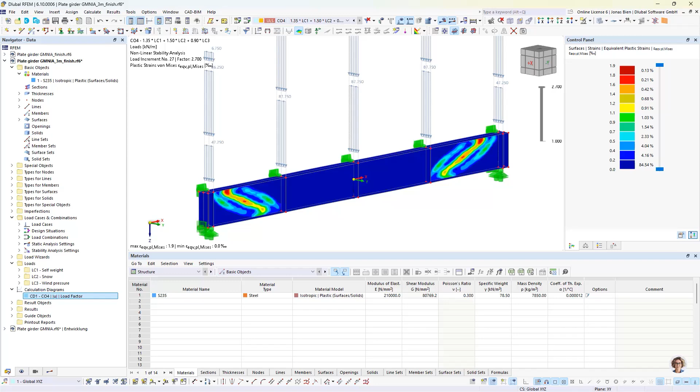That would be all I want to say regarding the results, but before we get to the summary, I would highlight that we chose the direction, the mode shape, and the combination of our imperfections more or less arbitrarily due to time limitations. The Eurocode, however, stipulates that imperfections should be combined such that the lowest load magnification factor results from the simulation, meaning further investigations would be necessary, checking other imperfection directions and combinations between the bow imperfection, flange twisting, and local buckling shapes.

For the initial model with 4.5 meter long buckling panels, taking a different mode shape, especially mode shape number 13, which involved deformation in the internal buckling panels, together with a member bow imperfection, and then aligning the imperfection direction of this member bow imperfection with the local imperfections, we get a slightly smaller critical load factor of 1.82. Remember that in the initial step with our initial guess, we got a load factor of 1.95. So there's quite some difference.